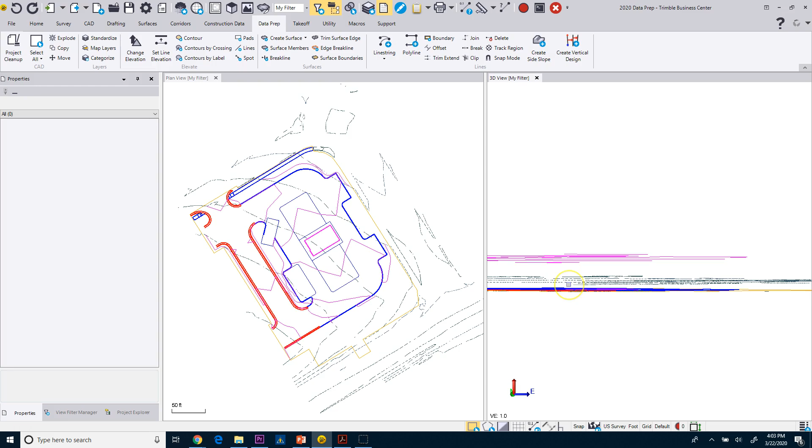All right, so now what I'm gonna show you is how to elevate these contour lines. And if we look in 3D view here and I rotate on the side, I can see that my original ground contours are not at the proper elevation, right? Like I showed you before. If I pick this one, it's on the elevation of 6 something, right? Not even close to what they should be.

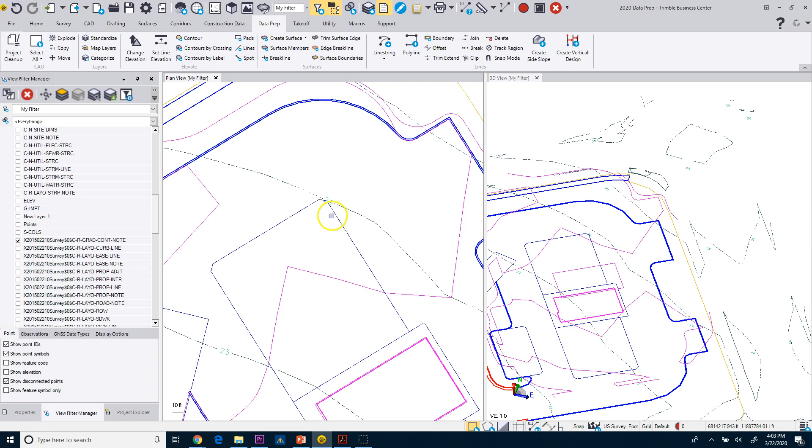So the first thing I'm gonna do is go into my layers and turn on this layer here which has those contour labels. So this is supposed to be 24, this is 23. Okay. Then I'm just going to come in and turn off the contours and the stakeout, getting rid of my proposed and leaving my original.

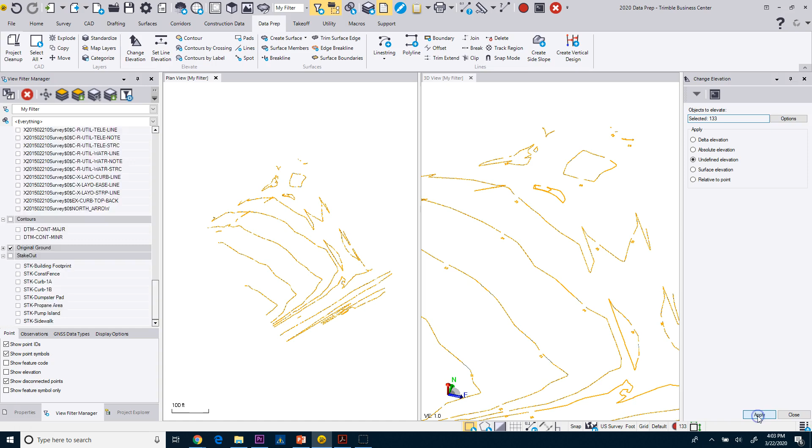Now, I am going to select all these contours and change their elevation and flatten them, basically setting it to undefined elevation. By doing so, it lowers them all down, flattens them all out, and then it allows me to come over to my display options and change the zero elevation display options so that these contours display in a different color. So I'm just going to choose magenta.

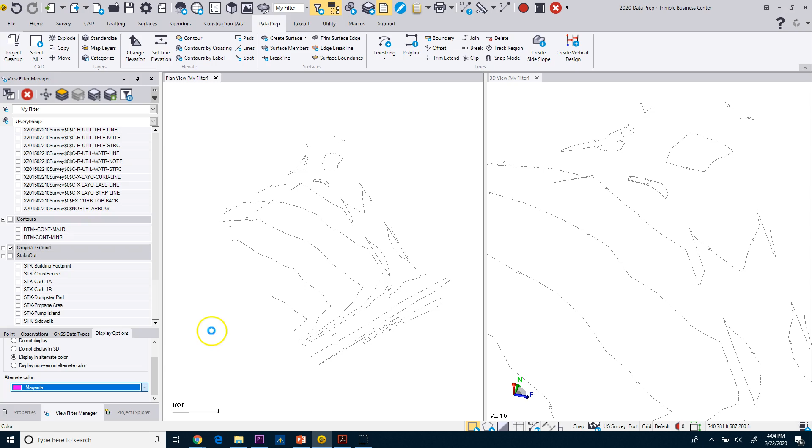And now I'm going to use this tool called Contours by Label. I'm going to select all these lines and the label. And now you can see that it's going to select them all and it's going to join across the contour label. So in here, it'll join across these guys and connect these lines. So I'm going to click apply. I'm going to analyze all this.

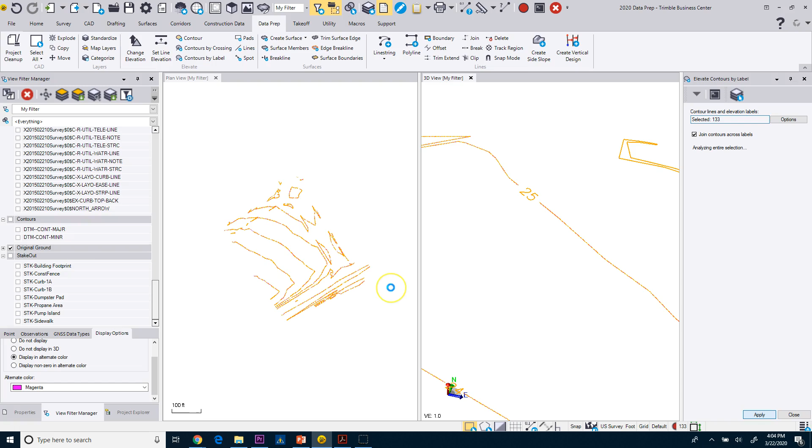And now, if we take a look, anything that was elevated is now turned to its original color. So here's 25, here's 24. Notice that it did join that little gap, but it didn't join this one, right? But it did elevate it. If I look over here, I can see that this one did not get elevated, right? But it should be 24.

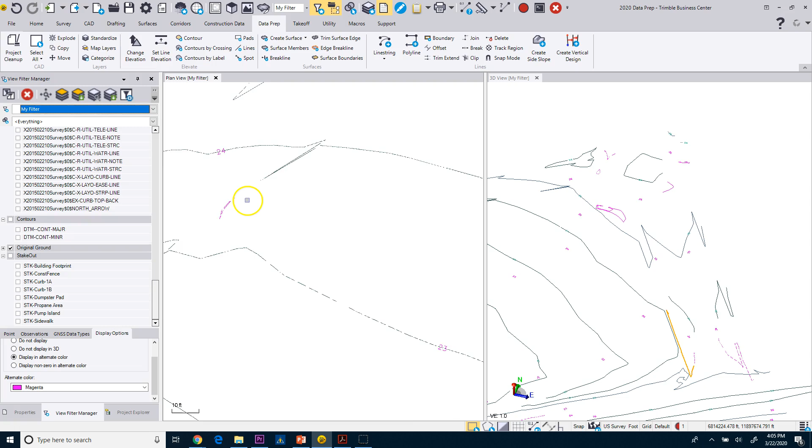So now I can just come in and start joining these contour lines. This one here is probably supposed to be 24. Same thing with that one, might be 23. So what I can do is now clean up the rest of these. If you come in here, like in this case, if I pick this 24 and I right click and I join and I pick that line there, it shows me there's a 2-foot gap.

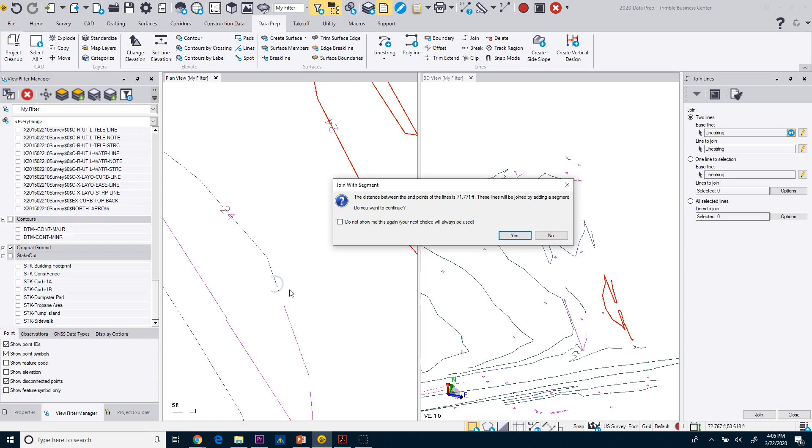That's fine. You'll see that when I close this, that basically picked that up and assigned it the elevation of 24. So you can work your way around joining these lines. So it's about 5 feet, that's fine. So now I've got that one joined. So here I can pick this. Oops. Let me make sure I pick the baseline, being this one. And then I go ahead and pick that little gap there, that's fine. And then we'll pick that one. We've got that one joined.

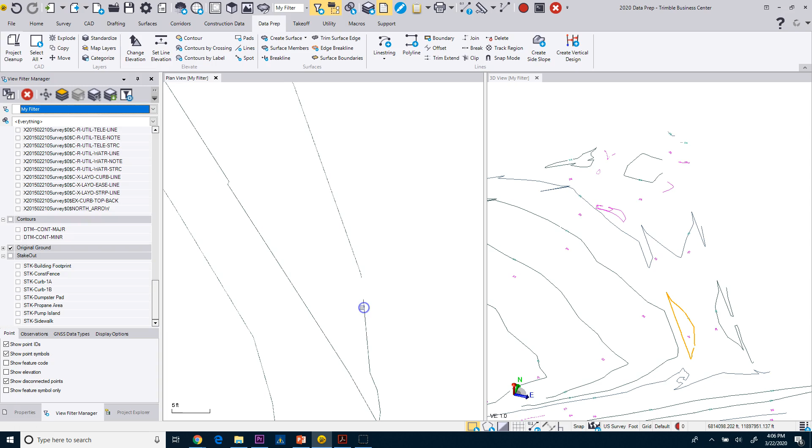And if you want, you could pretty much just grab this and drag it up, or I think there's a real tiny little gap there. Yep. So I would just take this guy and just close him off. Okay, close enough. Again, may not be worried about that. There may be areas where I'm not worried about it at all. So same thing here. I'm just going to pick this, right click and join. Just kind of cleaning this up. Little gap there, close that.

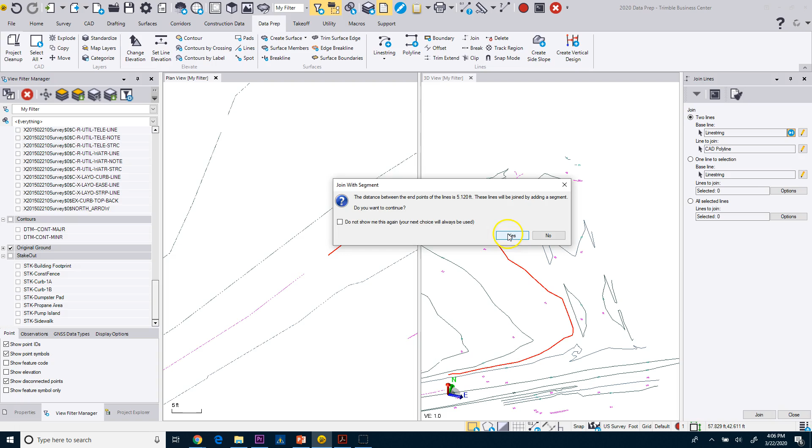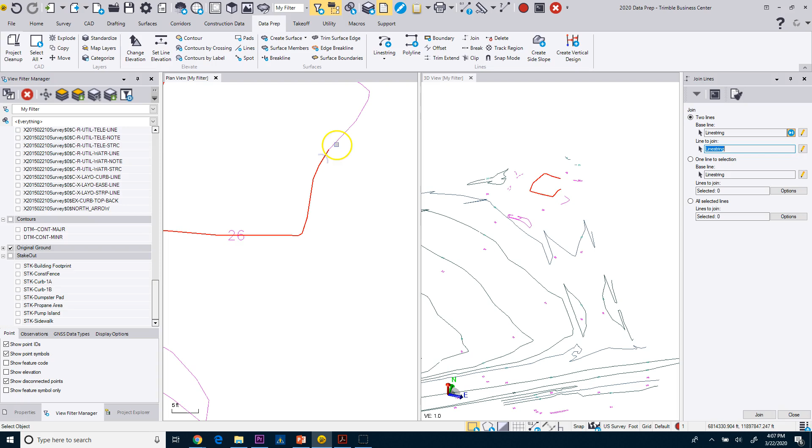We'll do the same thing. Pick this one. Yep, that was good. Then we'll come up, pick our baseline, pick this one, pick this one. We'll join that. Come over here, grab this baseline, and click there to join that one. And now we got the majority of them done. A little one up here will do. Again, this is probably outside of our limits, so I don't really care because that's out in the road, which we're not changing anyways. And then the same thing with this one.

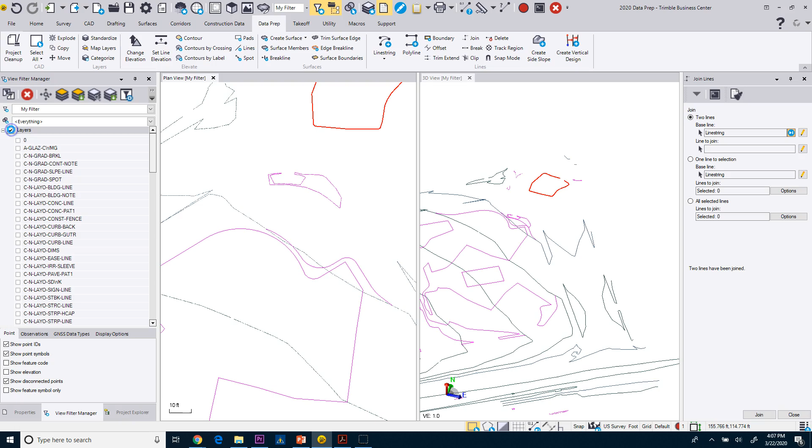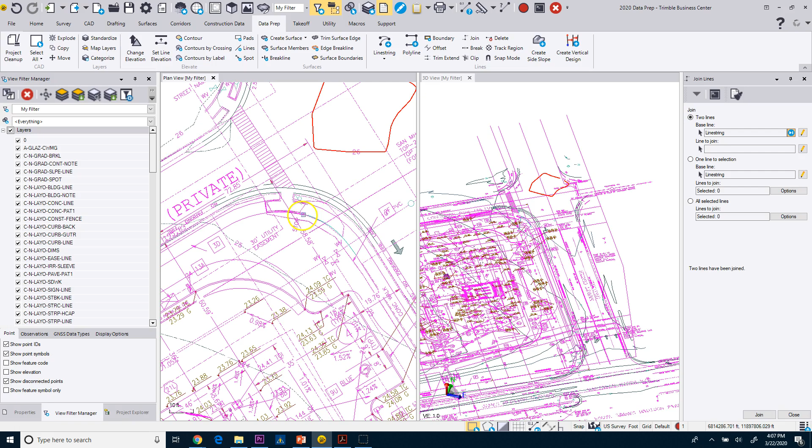If we turn back on our contours, we've got 25, I got 26. May have to turn on some other layers to determine what that is. You can see that they're all going to be magenta. All right, so if I come in here, yeah, it looks like it's in the sidewalk. So it's probably, let's see, 25, might be 24 if it's going down. So we'll have to figure that one out later.

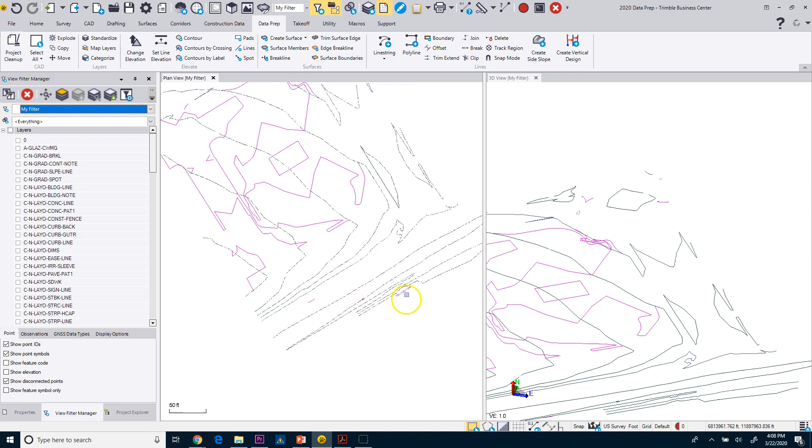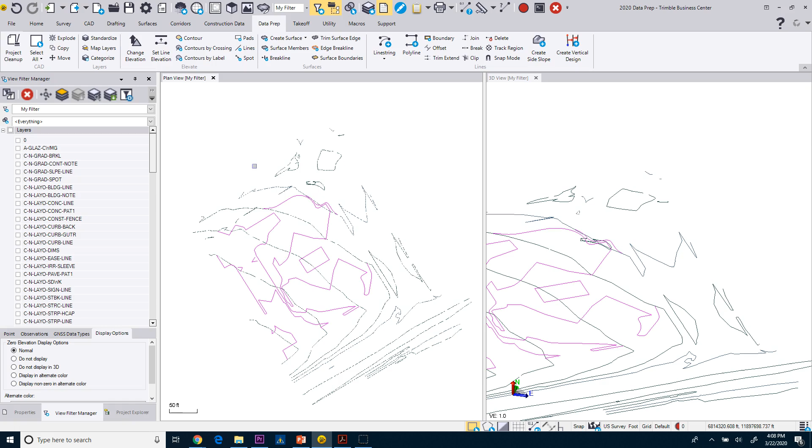But what I've got is probably good enough to show you what I'm trying to do here, right? So now I've got those contours. They're elevated properly. The ones that are still purple are not elevated, which again, I'm not concerned about because it's off my site. And I can just go ahead and delete those altogether. But leaving them undefined, they're not going to be used in my surface, so I can pretty much ignore them at this stage. But I'll leave them on that layer. I'll change my display option back to normal, and I'll deal with those at a later date. But that was really all I needed to do for this particular exercise.